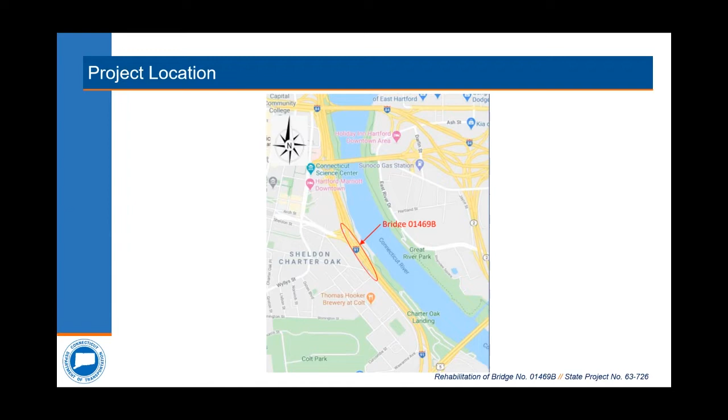You see our bridge here in Hartford looking down at it. Our bridge is this piece right here, I-91 southbound. It extends as far north as just outside the convention center garage.

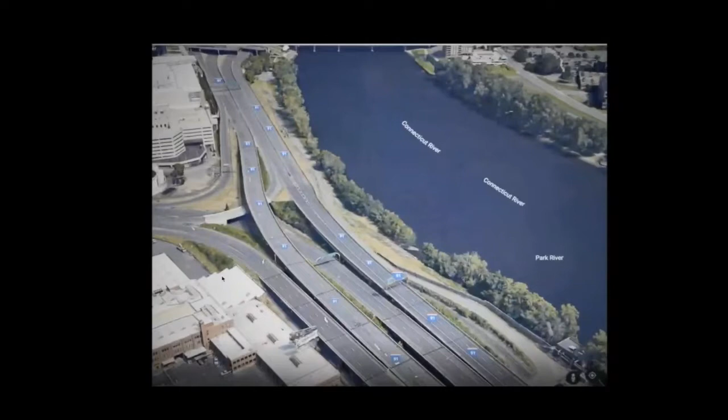And to the south, nearly as far as the entrance to the Colts building. It's an 1,800-foot long I-91 southbound viaduct.

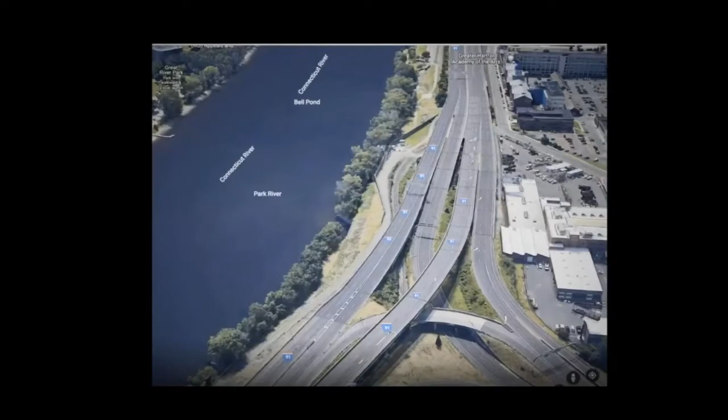The limits of our project are shown here in red. The bridge includes a portion of the southbound on-ramp from the Whitehead Highway. It does not include I-91 northbound or the northbound capital area off-ramp.

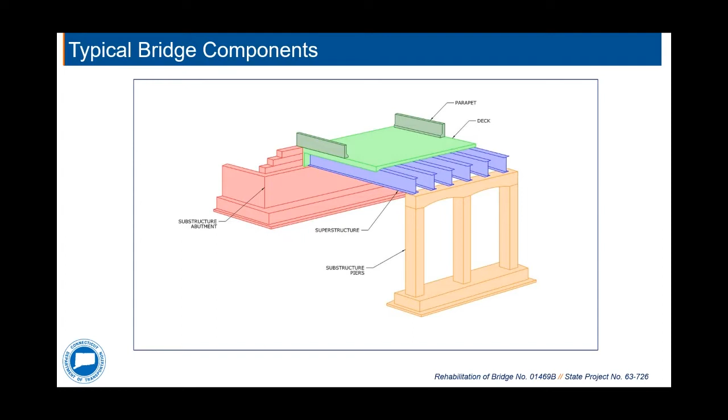This slide shows terms used to describe bridge components. Our bridge is 33 spans long with abutment support walls at the beginning and ends. There are 32 piers which support the steel beam superstructure and the bridge deck. The bridge was built in the early 1960s.

It is 33 spans long, and this includes 18 spans of the southbound on-ramp from Whitehead Highway. The total average daily traffic on the 3 lanes in the southbound direction is approximately 48,000 vehicles per day.

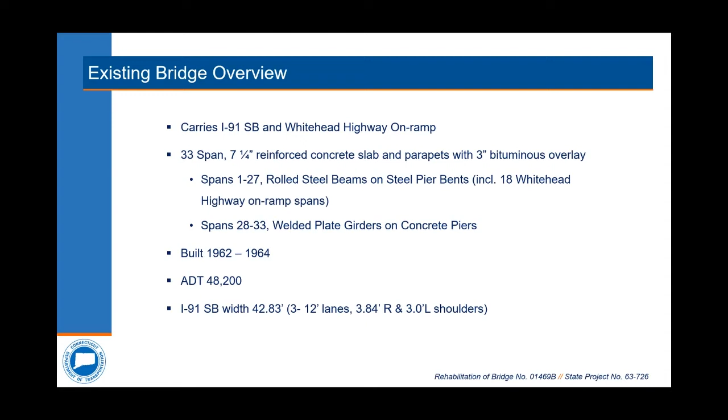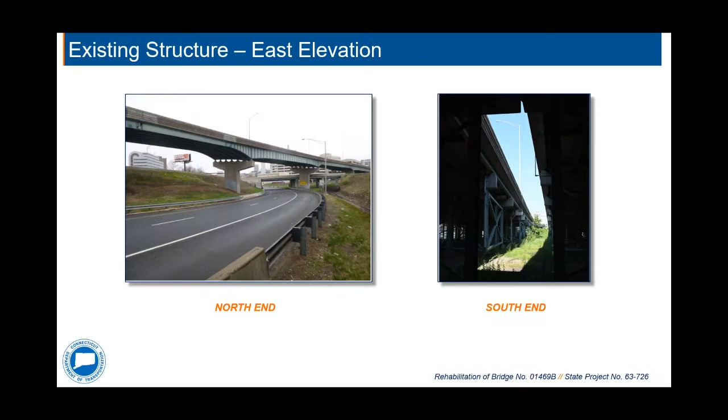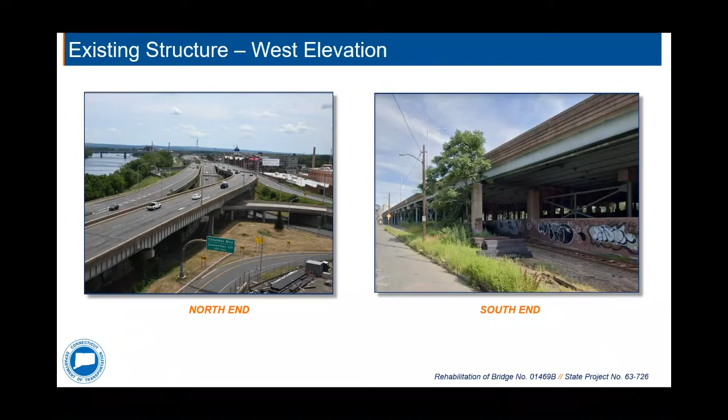The aerial view shown on the left looks to the south from the roof of the Convention Center parking garage down at our bridge. The photo on the right is from Van Dyke Avenue in the vicinity of the Colts building, looking north along our bridge as it crosses over Connecticut Southern Railroad.

The photo on the left shows the bridge crossing over the northbound on-ramp from Whitehead Highway. The photo on the right shows the bridge over Connecticut Southern Railroad and the railroad tunnel located at our north abutment.

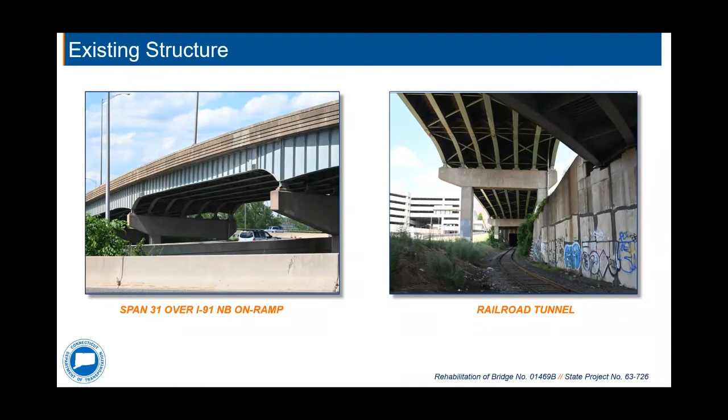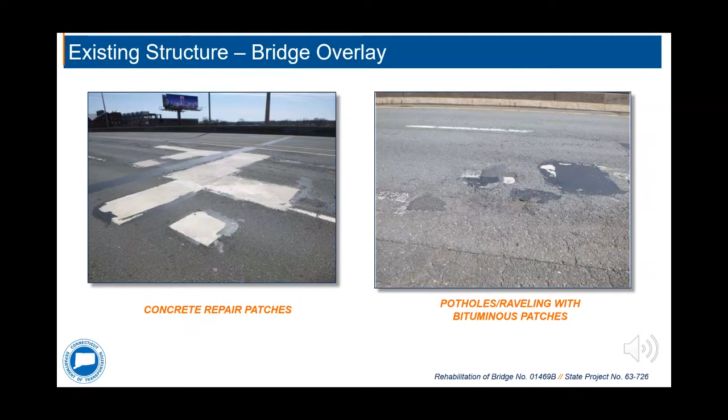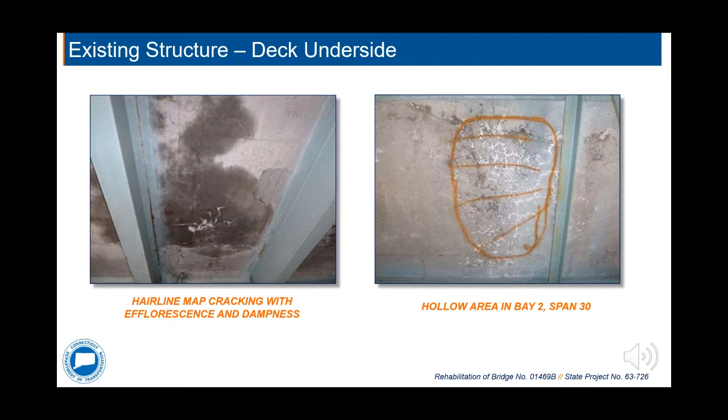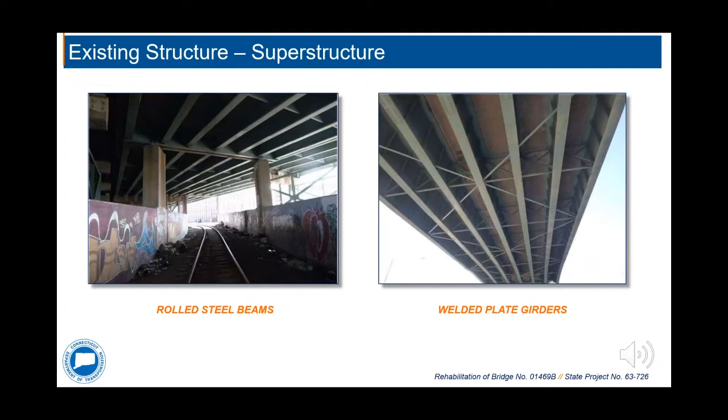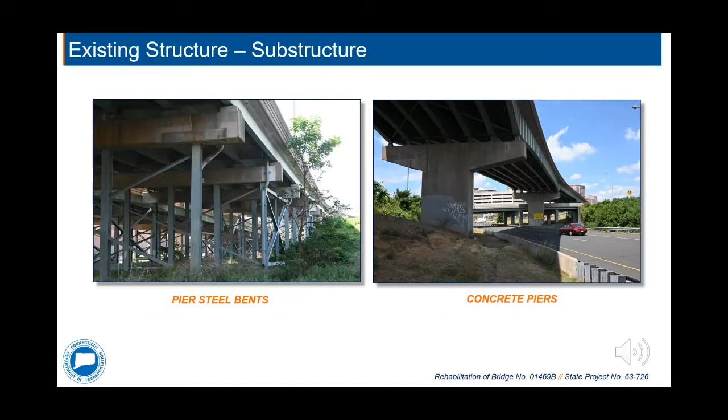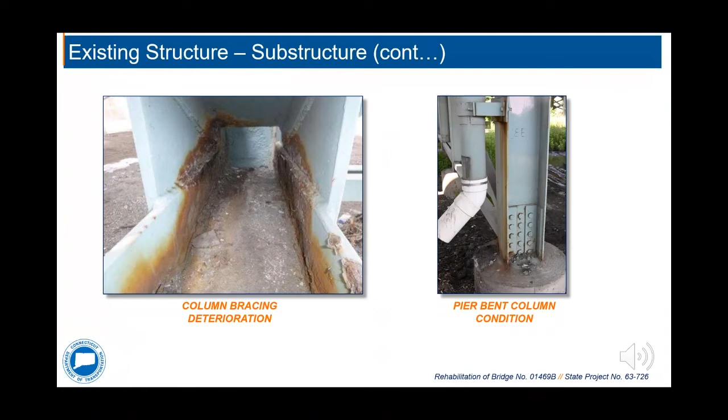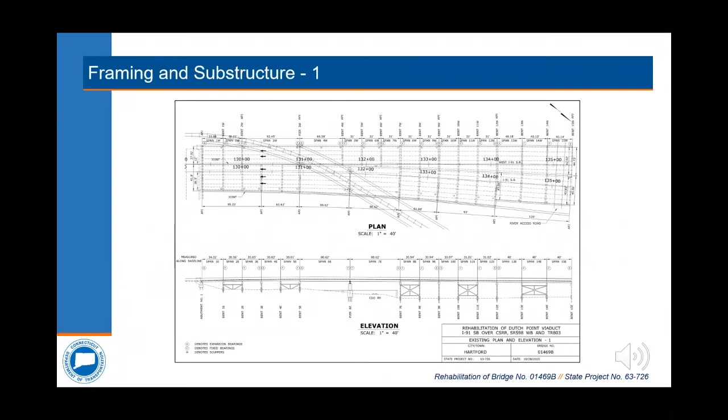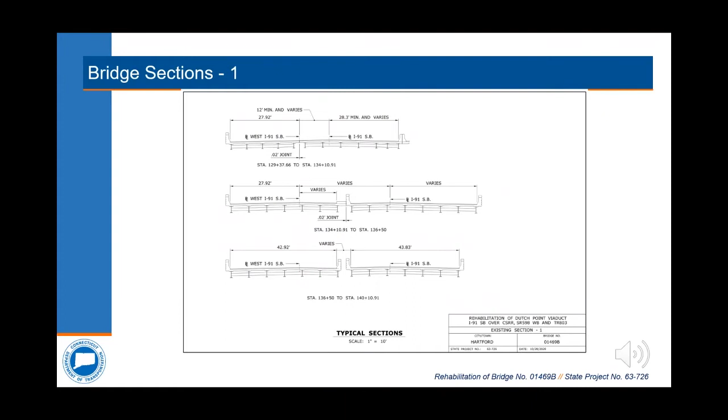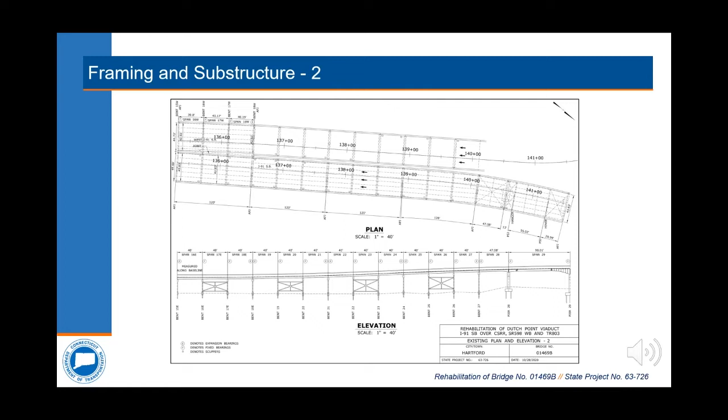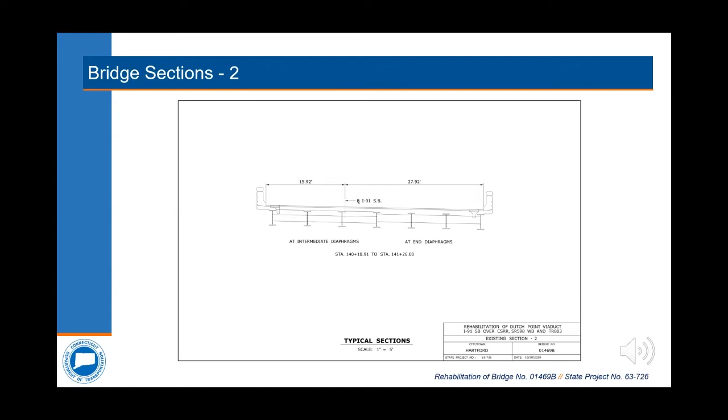This is a cross-section of the middle third of the bridge. In this area, the width of the bridge is approximately 43 feet, measured between the inside face of the bridge parapets, or curb.

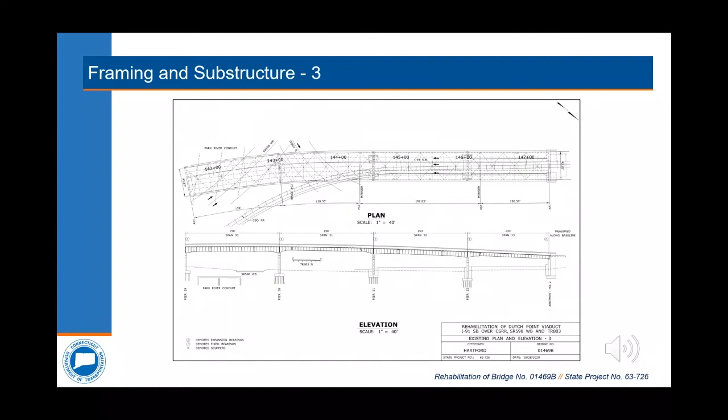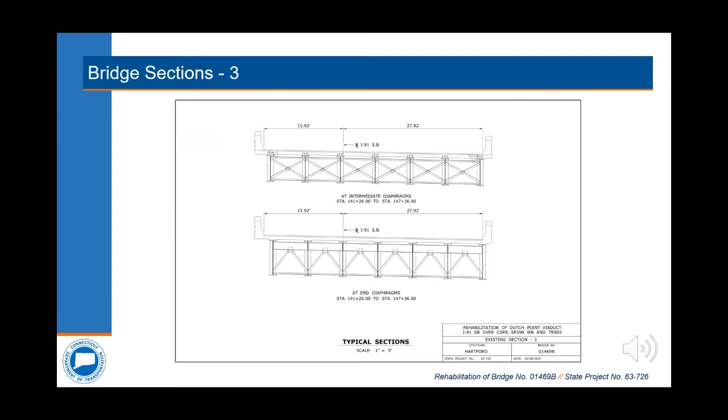The State of Connecticut Department of Transportation Bridge Safety Division inspects and rates bridge components in accordance with federally recognized safety criteria. As mentioned previously, the current rating of the deck is a 4, which is considered poor. This is due to the advanced stage of deterioration that exists in the 60-year-old reinforced concrete slab.

The steel superstructure is currently rated a 5, which is considered fair. This is due to the rusted areas of the beams and the localized deficiencies which are noted. The substructure, or piers and abutments, is also rated fair. This rating is primarily due to the steel section loss in the rusted steel pier bents and bracing. All of these bridge components are currently considered safe to the traveling public.

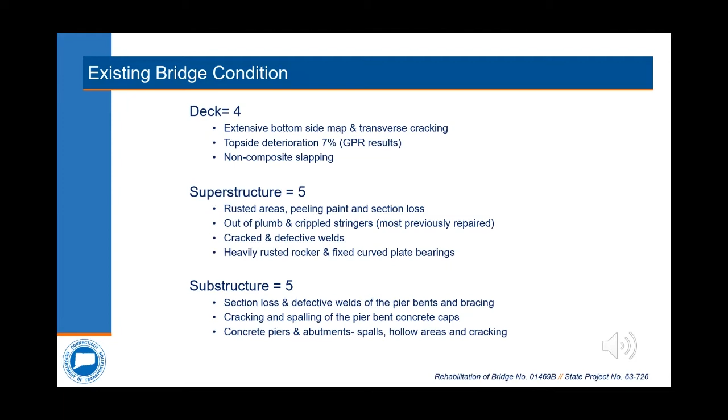This is known as slapping, and there is evidence in the field that this is occurring in some areas of the deteriorated deck.

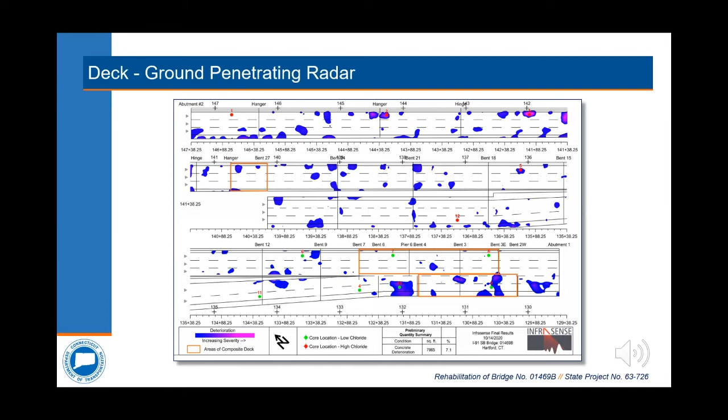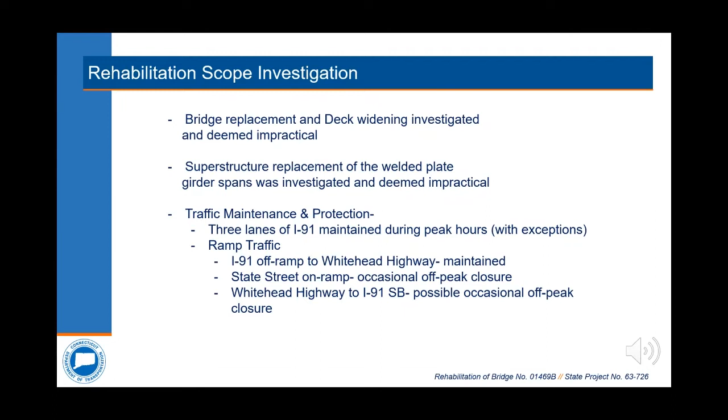We looked at possible alternatives to replace the bridge or to replace the superstructure. Due to heavy traffic and the limited available work area, both of these alternatives were deemed impractical for this site. The selected rehabilitation scope was determined to be to replace the deck with precast concrete deck panels and to repair and strengthen the steel pier bents as necessary to bring the bridge rating up to a good state of repair.

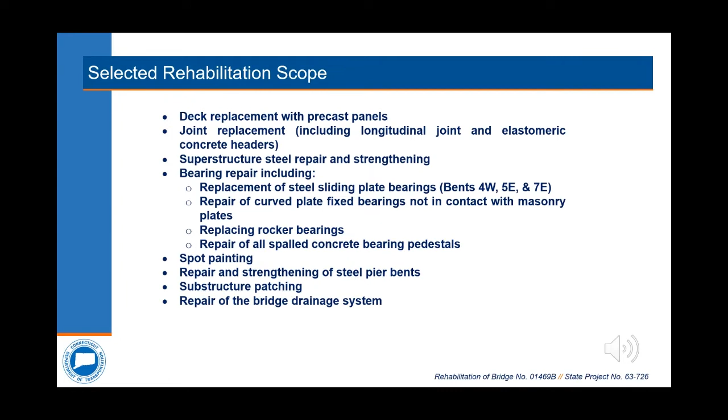Utility impacts, railroad impacts, permitting, and rights of way were all considered. We do not feel there will be any utility, environmental, or right-of-way impacts. We do anticipate coordination with the Connecticut Southern Railroad.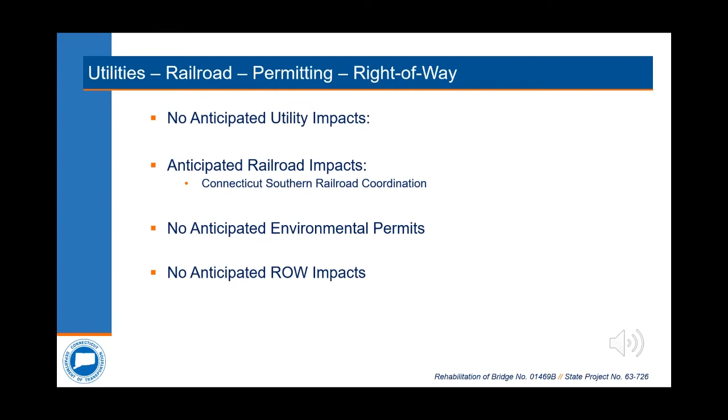The next two slides show sections of the two-stage construction sequence that is proposed to set the precast deck panels. A video presentation will further illustrate the traffic maintenance and construction scheme. All travel lanes will be maintained during the AM and PM weekday and weekend peak traffic hours.

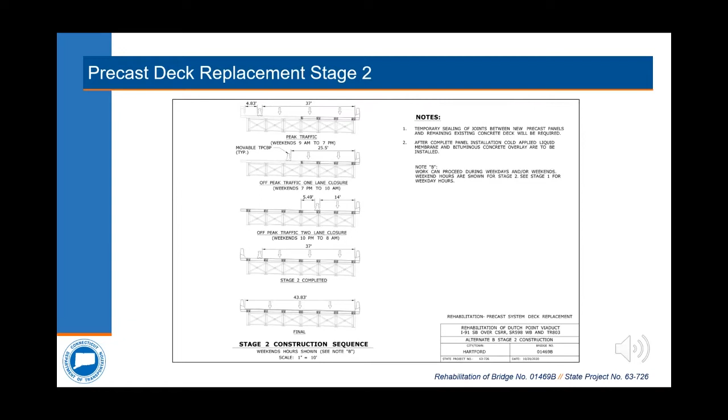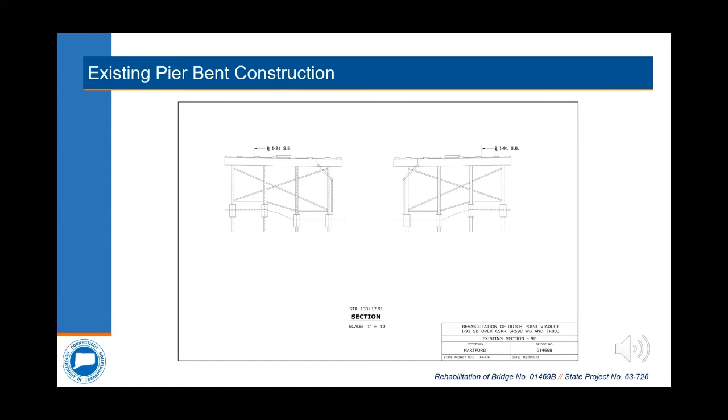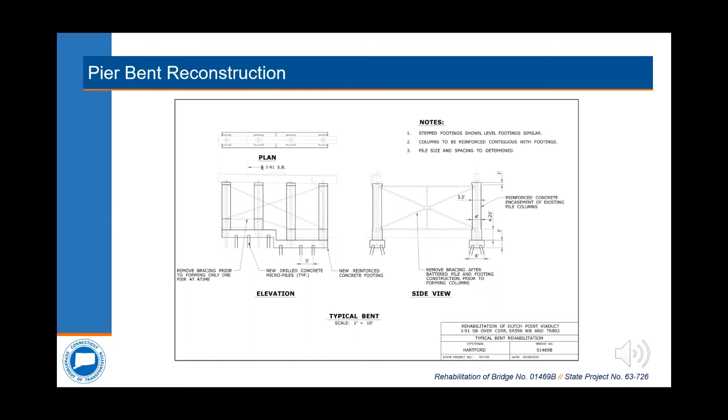This is a typical section of the existing pier bents that will be rehabilitated in this project. Drilled concrete micropiles will support a new concrete footing and a reinforced concrete encasement around the existing pile columns. These additional support measures will allow the existing bracing members that have deteriorated to be removed in the final condition.

Nightly closures of the State Street on-ramp to I-91 southbound are proposed during construction. This will only occur at night, and the ramp will be opened during daytime hours. Traffic will be detoured as shown in red, south on Columbus Boulevard to the Whitehead Highway southbound on-ramp to I-91 southbound. It is anticipated that some vehicles from the Connecticut Convention Center loading dock area will need to use the route shown in purple.

The nightly construction timeline was closely considered to verify the feasibility of removing and replacing sections of the existing deck during the limited available work periods. A total of 220 nights is anticipated based on this demolition methodology and the panel placement scheme we envision. The following video gives an overview of this process.

To illustrate the general maintenance of traffic scheme that we're looking to use, I'll show you a video that we found on YouTube. It's a similar project for a bridge in Virginia along I-95.

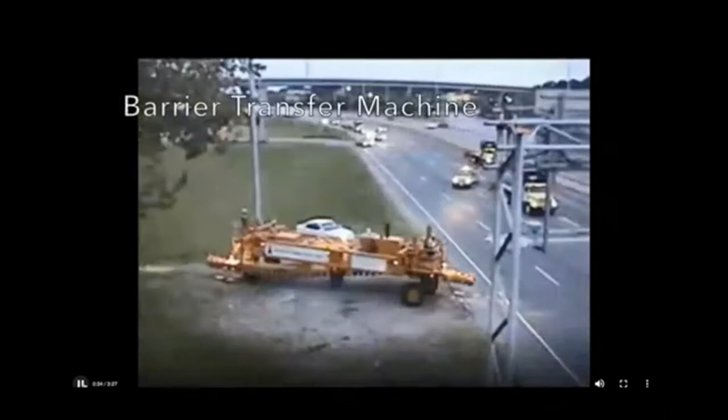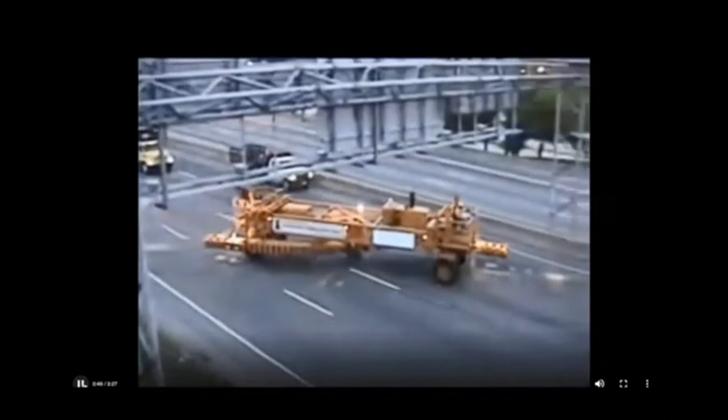In this view, you see all lanes are open during daytime hours. When it's time to take a lane out of service, this is used to move a temporary precast concrete barrier curb and take the lane out of service. While this is happening, traffic can continue to the right and left of the barrier transfer machine, which is what this is called. So what you see is a lane taken out of service during off-peak hours with traffic maintained.

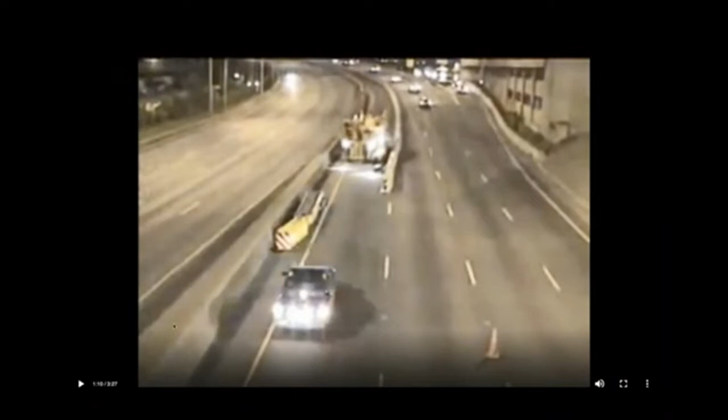Their case is much like ours, where they needed 2 lanes out of service, so they return the barrier transfer machine back to the point of beginning and make the same movement a second time to take the second lane out of service. And that's what's happening here.

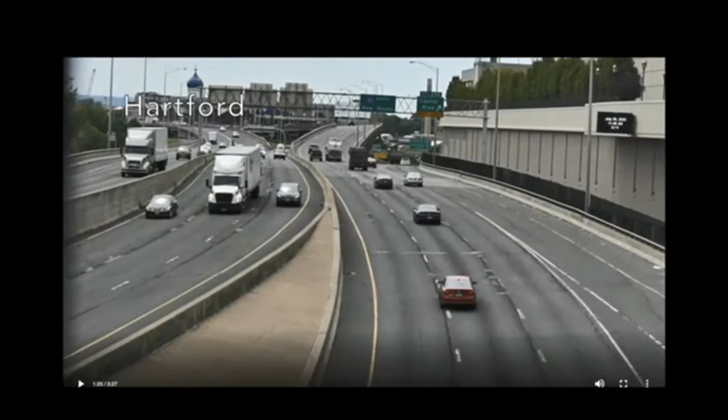Their site was very much like ours in that it has an off-ramp right at the entrance to the bridge, and you can see that off-ramp is maintained during these movements. For comparison, this is what the entrance to our site looks like, nearly identical. We'll be doing the same thing, using the barrier transfer machine to take this lane out of service, and then a second lane, all while leaving traffic flowing on 91 southbound and the off-ramp.

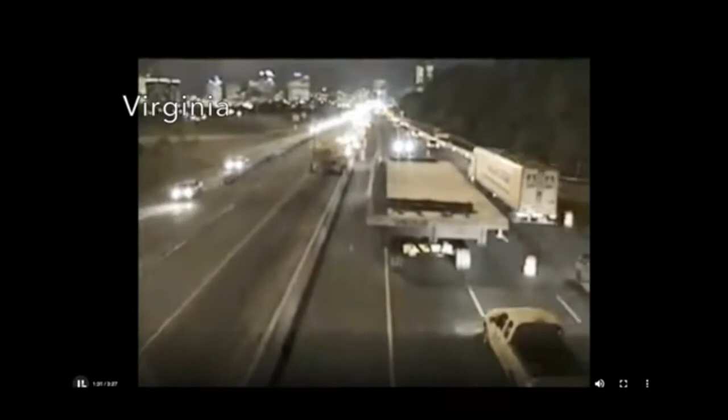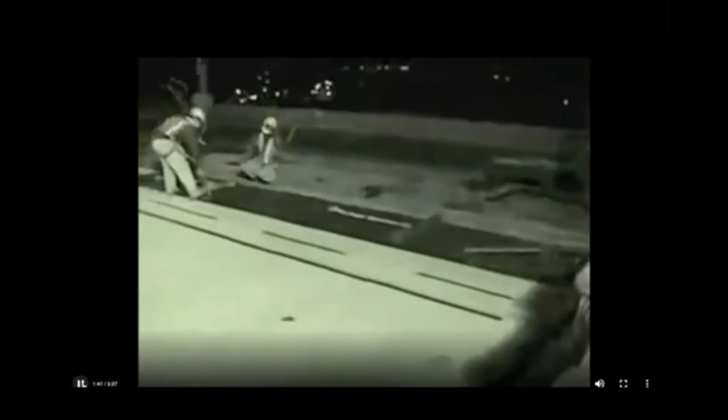The construction that took place during the nighttime hours involved bringing in a new deck, saw cutting the concrete, removing and setting the deck, and preparing for opening the roadway and returning the temporary precast barrier back to its original position, with all lanes then opened during the daytime hours.

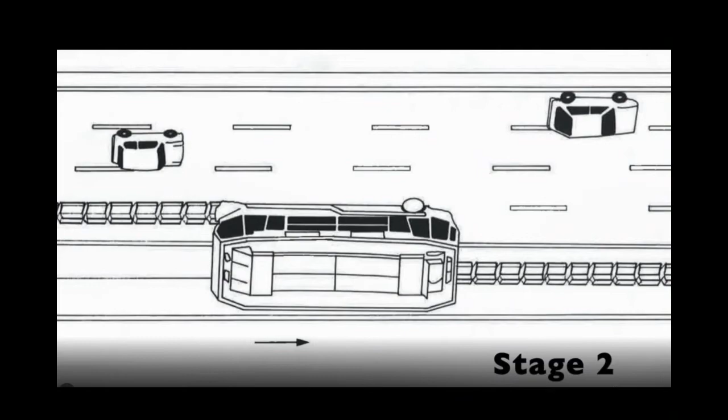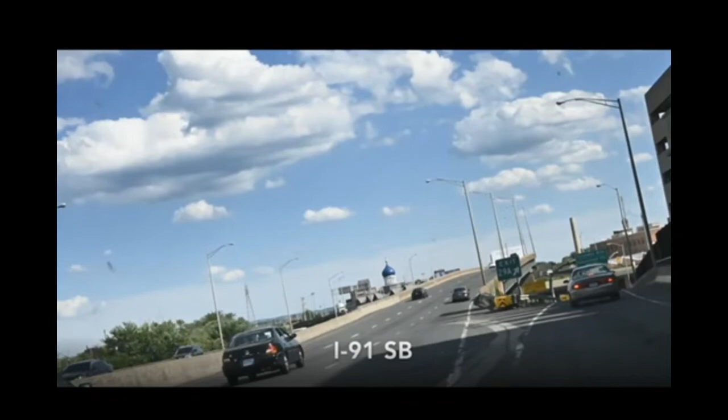The procedure for stage 2 is the same thing. We will be shifting the barrier from right to left and taking the right lane out of service. There is an off-ramp right at the bridge on that side that we intend to keep in service during construction.

This video shows the actual site during a condition with the State Street on-ramp closed and the Capitol Area exit remaining open, while the 2 lanes on the right side of the bridge as you approach from the north are closed.

Our traffic pattern will be much like what you see here, with the exception that the cones would actually be the precast concrete barrier that would be transferred by the barrier transfer machine.

As you get further south along the viaduct, we do pick up the portion of the on-ramp bridge that is over here to the right, and that is also part of this project.

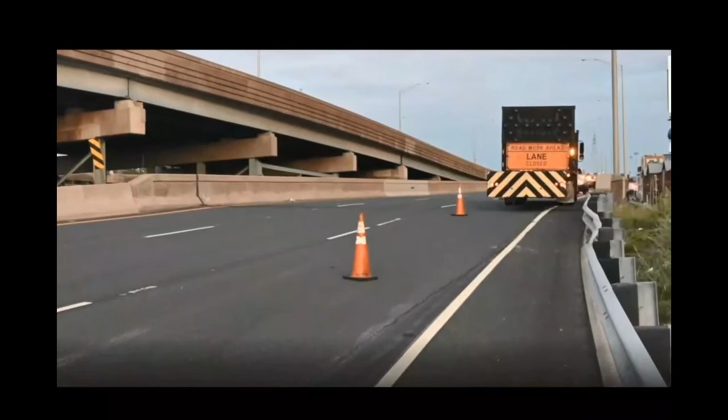To do that work, we have extra width in this area where we can shift traffic to one side or the other to allow us to perform the remaining portions of the deck as stage 2A and 2B, with some lane closures and little impact to traffic.

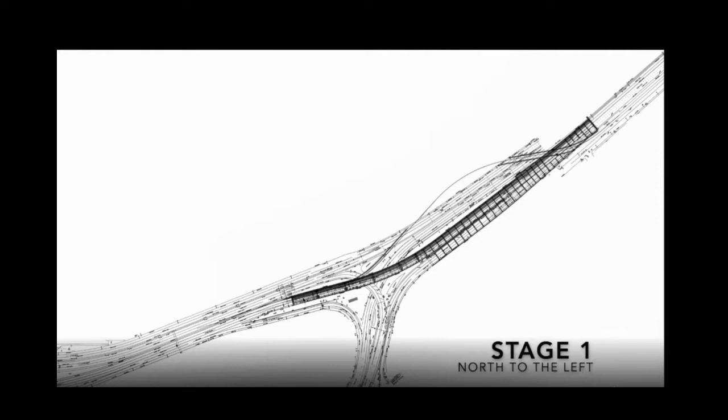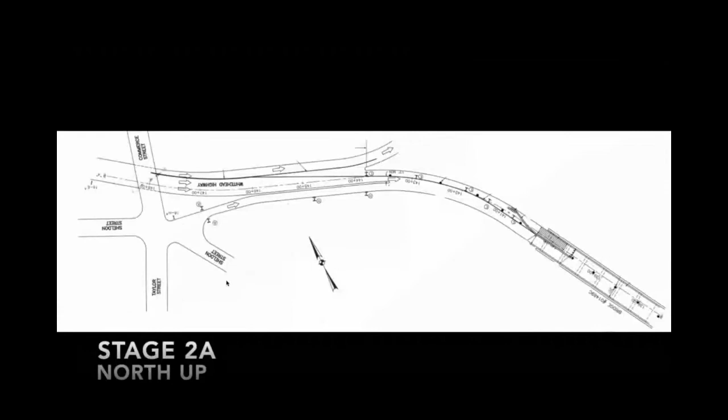Again, in stage 1 we build the left lane up to the center line of the main viaduct as you approach from the north. In stage 2, we build the right lane from the center line to the right, as well as the on-ramp portion of the viaduct.

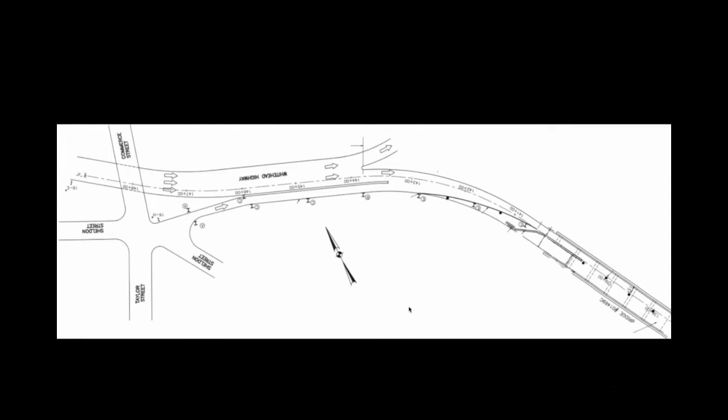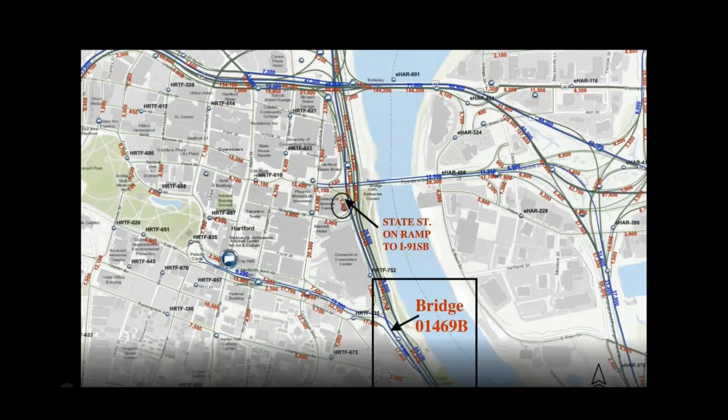We looked at traffic data in the area of the bridge to find what hours had the least amount of cars and which entrance, off-ramps, or streets we might utilize to perform this work. The yellow shows peak hour AM and peak hour PM. In general, we would need full lanes during those hours throughout the site.

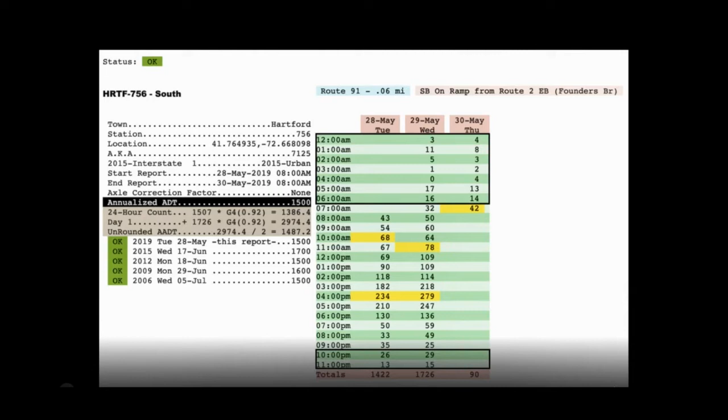We did, however, find there were, in the case of the State Street on-ramp, traffic counts greatly reduced, as little as no cars per hour from 4 to 5 a.m. So we feel comfortable proposing a closure of the State Street on-ramp.

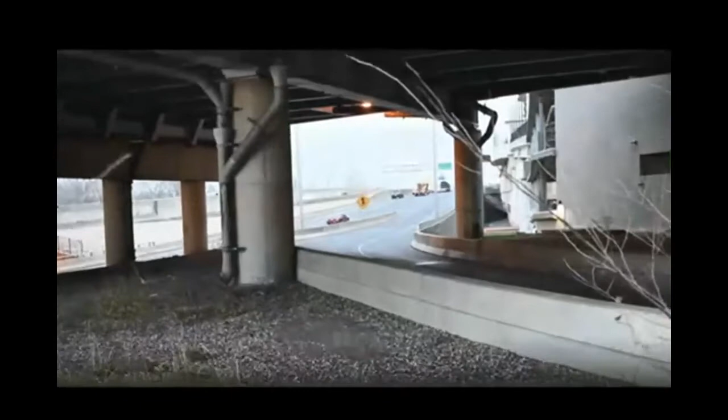We would leave this off-ramp open to the capital area, but the on-ramp would be used by the barrier transfer machine to access the site with a closure across here, looking back towards the old State House. This is the area where we're looking to use.

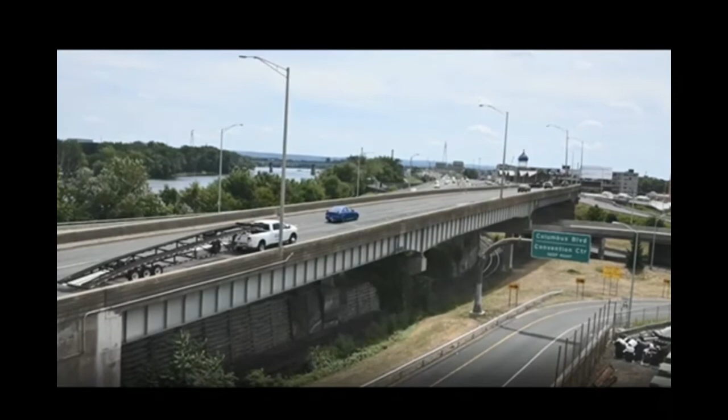All lanes would be returned and opened during the daytime hours, including the State Street on-ramp.

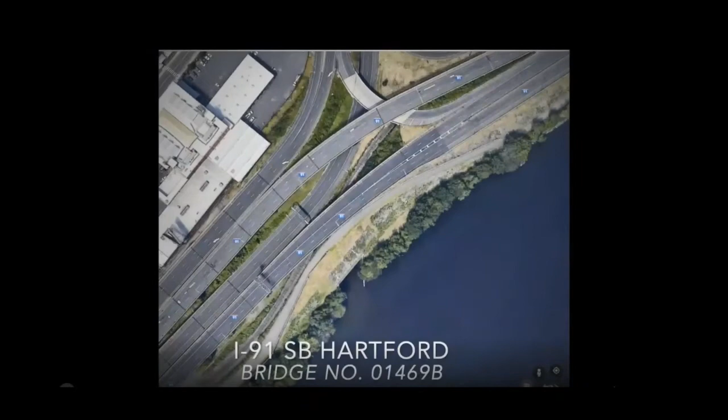That's a general overview. Thank you for your attention, and we appreciate your questions in advance.

The construction is estimated to cost slightly less than $59 million with 100% state funding. We anticipate construction will begin in spring 2023 and complete in fall 2025. Please note this schedule is preliminary and predicated on the availability of funding.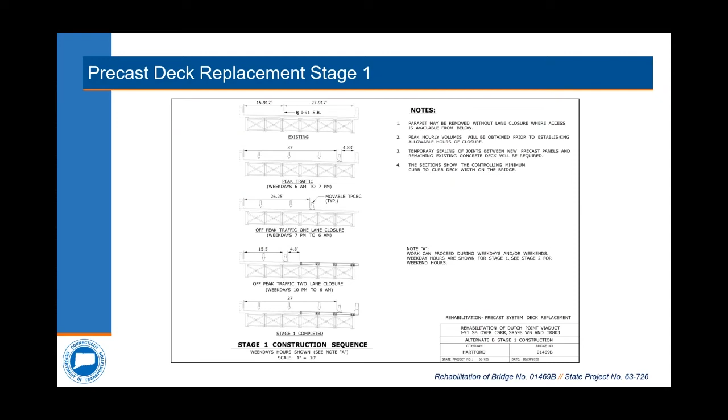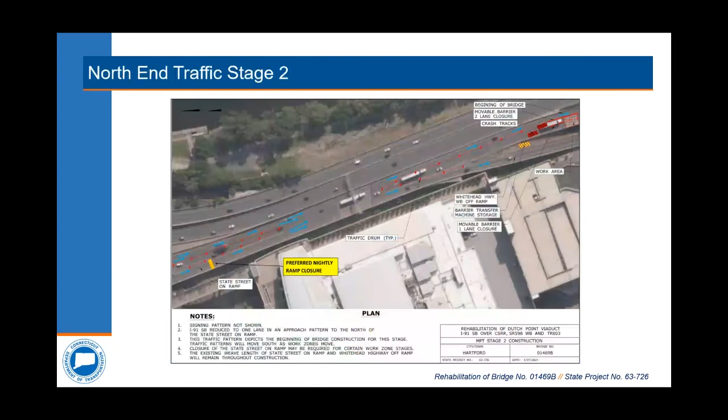Sure, thank you, Michelle. We do anticipate noise. We will be saw cutting and jackhammering. There'll be some noisy activities during the evenings as well as the morning hours. Noise will be limited to 90 decibels. This is OSHA's permissible exposure limit for all workers for an 8-hour day. So we anticipate that with the proximity of the housing and the low level, it shouldn't be an issue.

Again, if it does become problematic, you can discuss with the district construction personnel. They're going to be available on site every day, as well as contact phone numbers will be put onto the website. Thank you for the question.

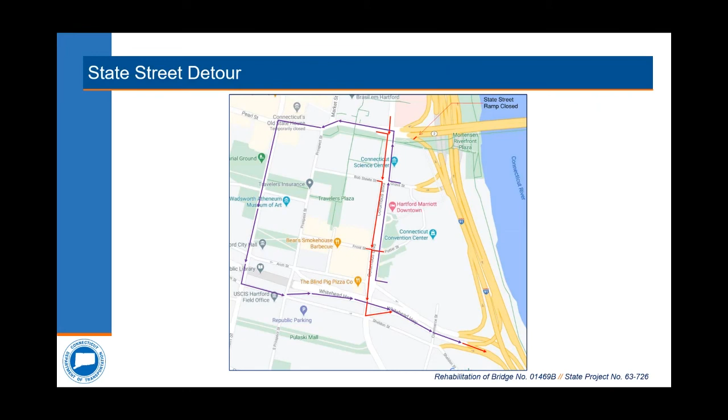We're scheduled to start in the spring of 2023 and be completed by fall of 2025. It's a 3-season job. It's a large bridge, with 33 spans and 2 stages of construction.

We have a phone question: Why will this construction project take 2 years to finish, and why can't it go any faster?

Would Tom or John like to take that one? Yeah, Michelle, I'll field that. The work is limited by the traffic maintenance. We looked hard at the numbers of vehicles and are trying to avoid backups at night to keep safety in mind. That being said, the constraint for setup times for the traffic barriers, signing, lighting, and nightly mobilization of the equipment limits production.

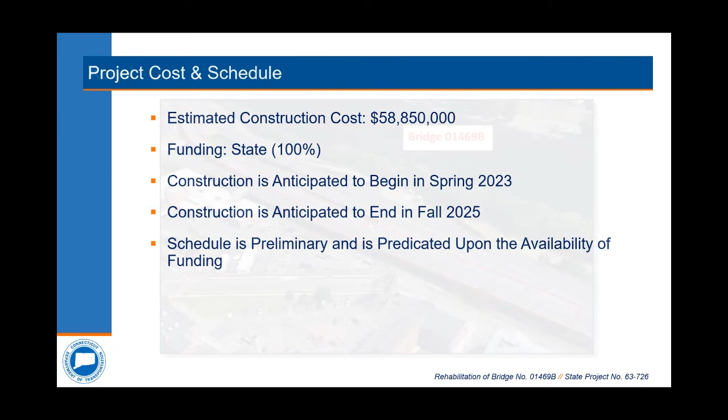Additionally, the magnitude of the project—it's 1,800 feet long, and we're doing it in 2 stages. We've done similar projects in the past, so we're familiar with this type of construction; it's not brand new. We also have some exposure to estimating times of work, so we feel pretty comfortable with our estimates.

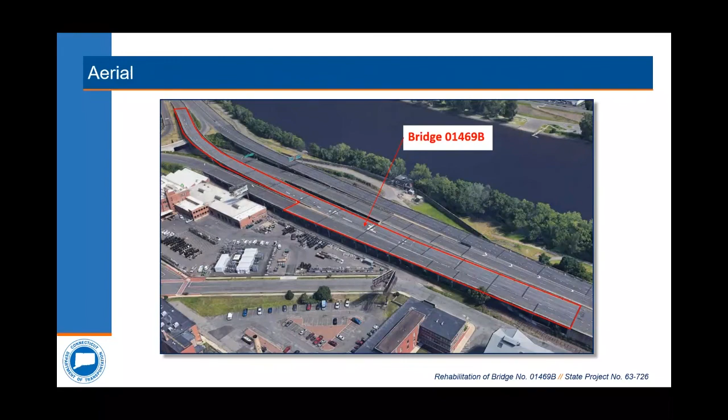Construction may be completed faster, and we'll consider offering incentives to the contractor for early completion. But at this time, I'm not so sure that it's going to be possible to bring it in much earlier.

Thank you again. Thanks, Tom.